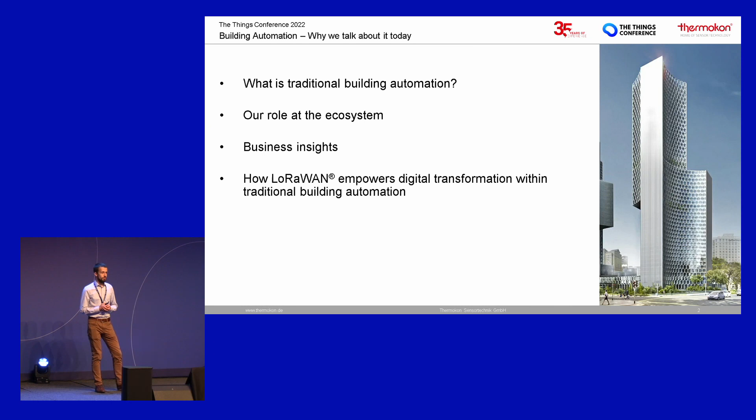Just so you get an idea what you can expect within the next 20 minutes. First of all, we want to show what traditional building automation mainly is about. Then show what Thermokon's role in this ecosystem is, so you get an impression why we are talking about building automation today, and give some business insights. And then come to the most important point and show how these traditional building automation systems can be empowered with LoRaWAN.

Okay. This year's Things Conference is under the topic of digital transformation. And we found a perfectly fitting statement that describes exactly the issue we are confronted with in traditional building automation. This statement says that digital transformation is about using structures of yesterday with methods of today to solve challenges of tomorrow. And now I want to show how this happens in building automation, and therefore I want to take you on a short trip through some basics of traditional building automation.

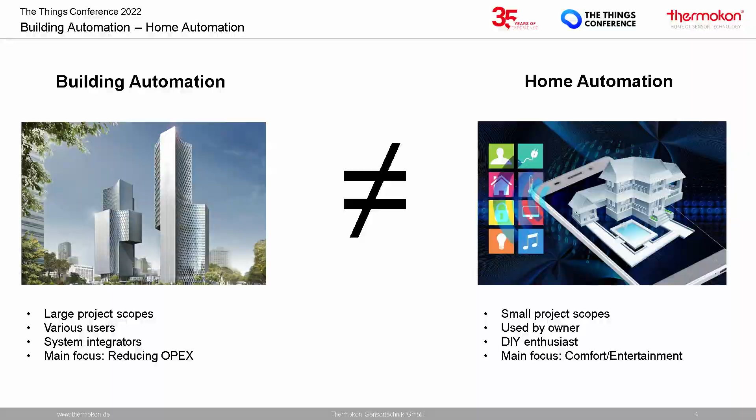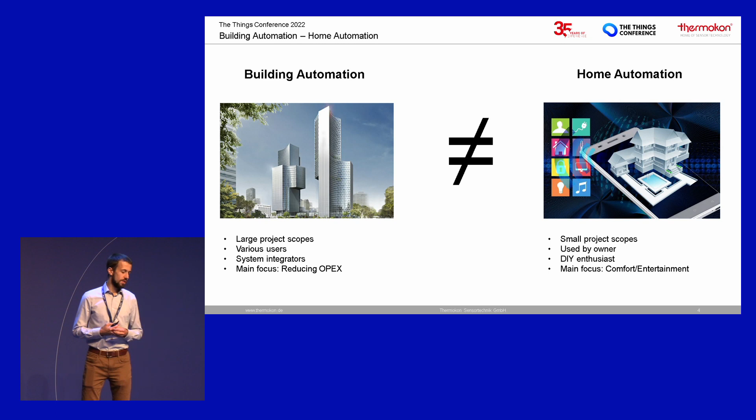First of all, a short definition so it's clear that we are talking about the same issues. There is a difference between building automation and home automation. The main difference is the project scope. That means if we are talking about buildings, the project scope is much bigger than in home automation. Also, the users are different, and building automation projects are often realized by system integrators, and the main focus there is to reduce the operational costs for the building owner. But the technology that is used in both parts could be the same.

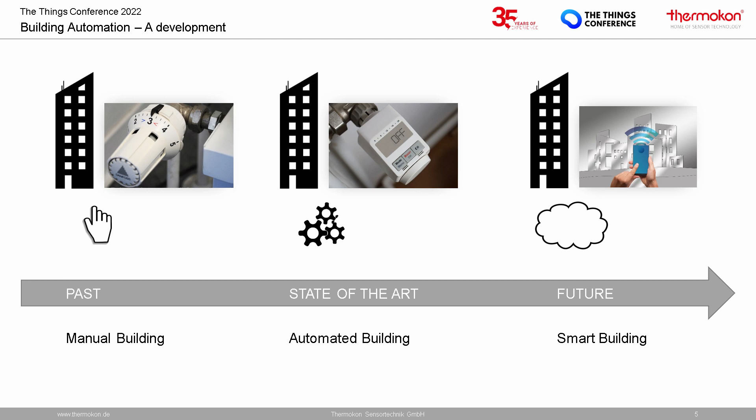During the last years, building automation has developed from a manually operated building to an automatically operating building, and then to a smart building, where this smart building also includes data and things around the building, for example outdoor weather conditions. Even if a really smart building that is connected to the internet and can be remotely controlled is technically possible, there are still many manually operated buildings in the field at the moment. And even if these buildings are automated, the automation is oftentimes not really smart, as we perhaps have a simple time-based shutdown command at the end of the day without taking into consideration the occupancy status of a building. This is an automated building, but it's not very smart.

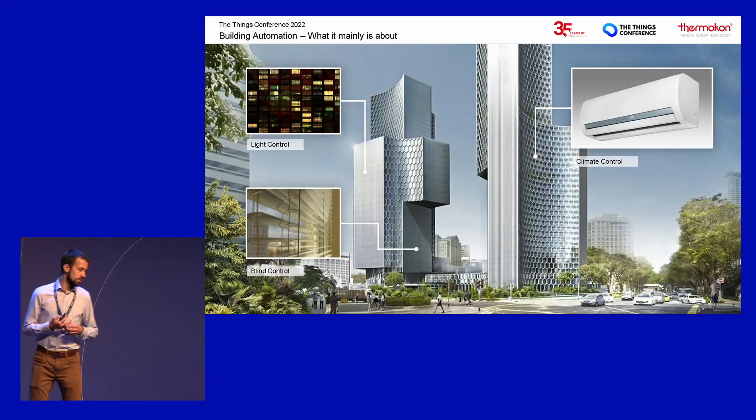When we are talking about building automation, we are mainly talking about these three different parts. The first part is climate control, everything that is related to heating, cooling, and ventilation. And the second and third parts are blind and light control. It's clear that there are also other topics related to building automation, like entrance control and fire protection, but we want to focus now on these three, as these three are mainly responsible for indoor air quality and for the emissions a building has. And that is the main goal of a smart building, that we could reduce the emissions the building causes, and also improve the indoor air quality.

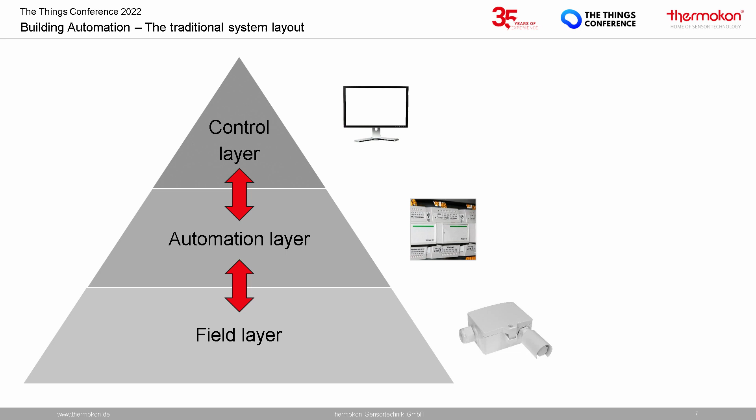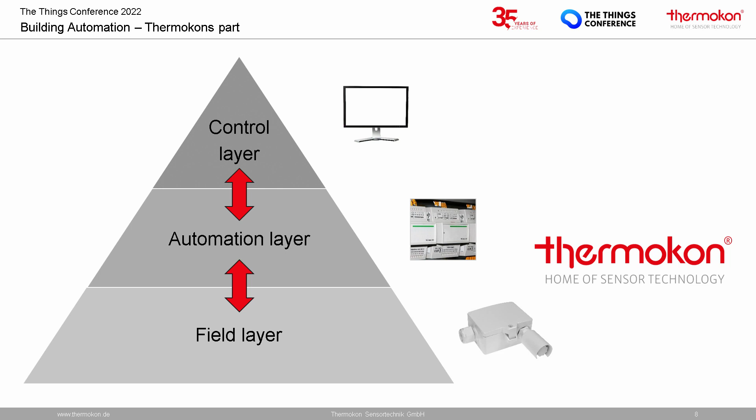As for Thermokon's role in this ecosystem, we have been providing solutions for building automation on the field layer for 35 years now. That means we build sensor solutions and also room operating unit solutions that take part in this ecosystem. If we are doing so, it's clear that our components have to have structured communication processes so that we can ensure that our devices can communicate within a standardized building automation system.

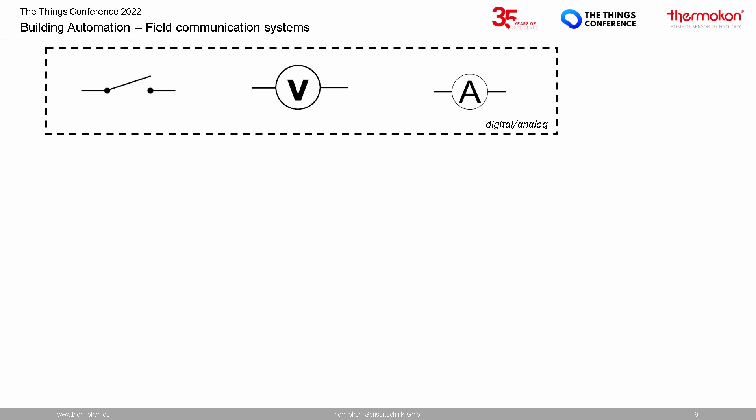So there are many different field communication systems existing in the field at the moment. The first, or let me say the oldest, are simple digital or analog outputs, just switching something on and off. And the simplicity of these systems is also the biggest advantage. That means you don't need experts to install them. And as they are so simple, they are also widely used in new projects today.

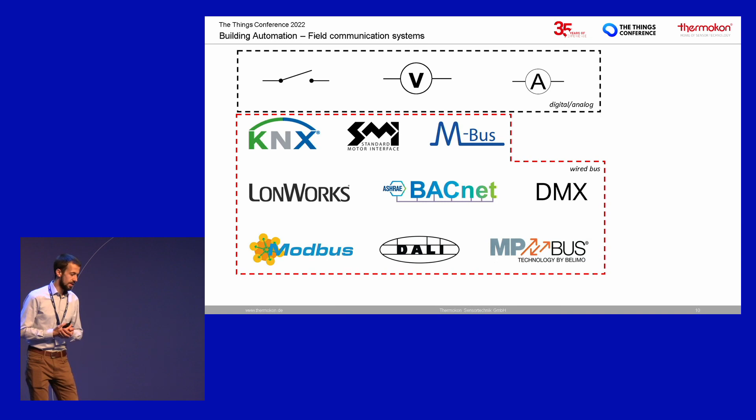The second type of field communication systems are traditional wired bus systems. These bus systems are used if you want to transmit more complex data. And each of these different bus systems has become a kind of standard in different building applications. Just to give an example, the DALI bus system is mainly used in high-quality lighting applications, and the BACnet wired system is mainly used in everything that is related to heating, ventilation, and air conditioning.

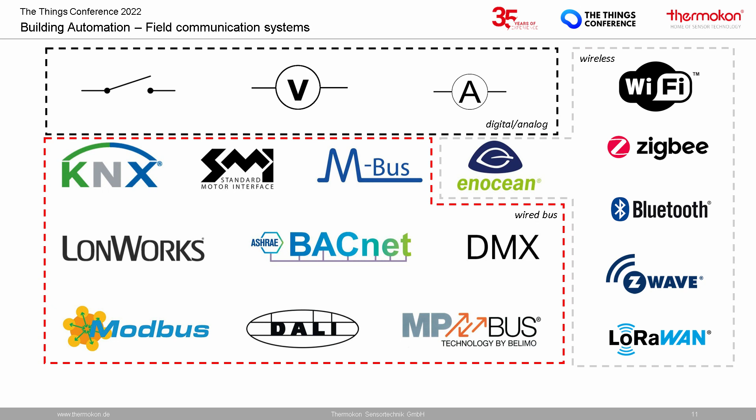That brings me to the third big group of communication systems in the building. These are the wireless systems. Each of these wireless systems also has its main application. If we are talking about EnOcean, then we're talking about energy self-sufficient devices. That means you don't have to care at these devices about battery lifetime or about a power supply, as these devices could operate energy self-sufficient.

If we need higher data rate, then Wi-Fi comes into the game. And if we want to cover long ranges, if we have, let me say, big buildings or need an IoT-ready protocol, then LoRaWAN is perfectly fitted.

Now, if you see all these different field communication systems, then it becomes clear that inside a building, everything is about interconnection. That means you need systems that can communicate with other systems, as it's hardly possible to find one communication system in a building that covers all requirements. These requirements in the building are sometimes very complex and very different. There are many questions that have to be answered before choosing the right communication system.

Just to give an example, is it a retrofit project, or are we talking about completely new construction? If we are talking about wireless systems, then oftentimes the question occurs, is a cloud application for the customer possible, or does he need an on-premise application? So also the application type is a very important reason.

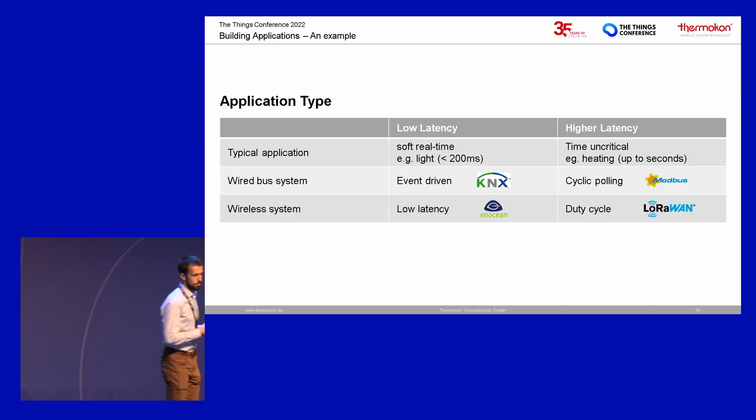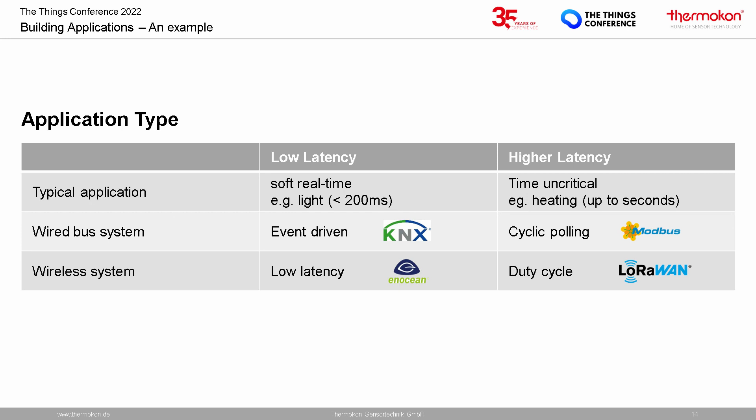If we are talking about soft real-time applications in building automation, we are talking mainly about blind and light control, where the user normally expects a direct response from the building. That means if I push the light button, I expect the light to be on within the next 200 milliseconds. So if we have this application, then we can choose an event-driven communication system like KNX, or a wireless system like EnOcean, which has very low latency times.

If we, on the other hand, are talking about applications where a higher latency time is no problem, for example, a heating system, where it doesn't matter if the heating turns on 5 seconds later or earlier or a minute later, then also, let me say, a slower bus protocol like Modbus is no problem, or the duty cycle restrictions of LoRaWAN also are no problem. So this was just to make clear that there are many questions to answer before choosing the communication protocol for a real smart building.

Besides the control system in the building, there are also other systems existing. Nearly every commercial building has its own IT system. And the issue we are faced with in the field is oftentimes that these systems are independent from each other. That means there are different responsibilities for these systems. They are locked to each other, and it's very hard to get access to such a system if you need their infrastructure. Sometimes this leads to some curiosities.

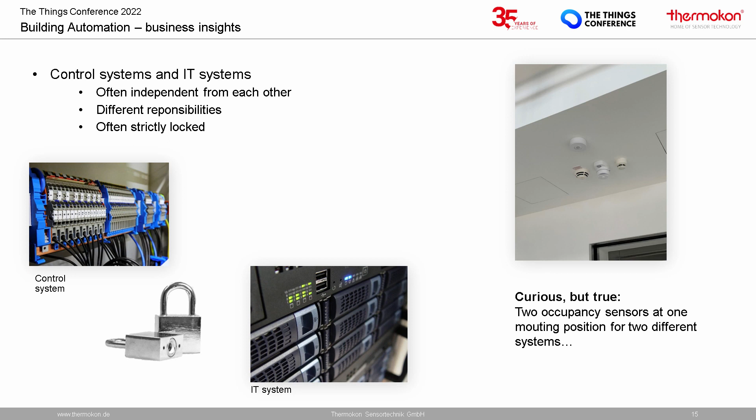As you've seen on the right-hand side, it was from a real project we were faced with. There you see 2 occupancy sensors mounted on the same position, but they belong to different systems. So if you're talking about green buildings or smart buildings, it is not very smart to put 2 times the same sensor to get 1 signal out of the room. But there are different responsibilities. The systems are not able to communicate with each other, so there was no other possibility.

There are also some other points very important in building automation. At the moment, in building automation, there are very systematic and long tender procedures. That means there are many participants along the chain that you have to convince if you want to introduce a new technology, and that sometimes makes smart building applications a little bit slow. Also, if we are talking about on-site construction, we have divided ecosystems. That means if you want to install a technology that belongs to different ecosystems, it can cause some struggles on-site later.

Many buildings are also, at the moment, operated by data point-driven business models. That means the owner has to pay for every data point he needs in his building automation system. And so the system integrator is asked to build up the building solution just for the minimum needs for a sensible automation. But these buildings cannot offer their whole potential. Perhaps sometimes there's just 1 data point missing to make a regulation really smart, and it's oftentimes not possible to get these data points, as in the earlier stage they were not agreed in the business model.

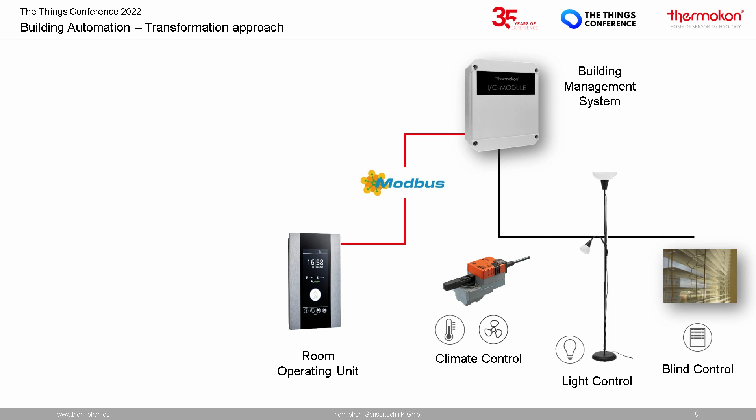Here we see just an exemplary example of a traditional building management system. You have in the upper part a building management controller where a room operating unit is connected directly via a wired Modbus communication interface. Then you give the inputs from the room operating unit to the controller, and this controller then controls the climate control, the ventilation, the light, and the blinds. That means we have very low latency times in the room, we have a familiar user interface, and this is, let me say, the single room automation solution.

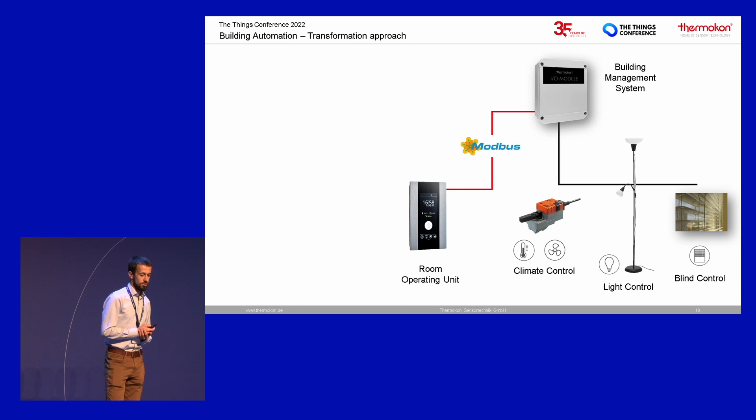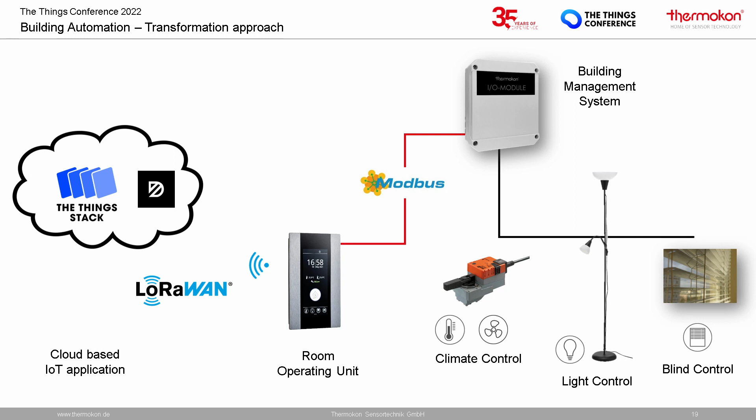If you now add LoRaWAN connectivity at the point of the room operating unit, you have the possibility to get all the data out of a room directly into a LoRaWAN-based IoT application. That means you can fetch all the sensor values the room gives you. You also can fetch the actual state of the lights, the blinds, and the ventilation system. And the other way, you can also put some override commands. That means you can put really smart control commands back to the system using the LoRaWAN ecosystem.

I hope it now becomes clear how both systems, the IT system and the control system, could come together in, let me say, one device. And the main advantage here is that the existing building management system could stay as it is. That means you don't need physical access directly to the building management system. You don't have to change any components. You don't have to replace everything, and you are relatively fast with deploying this solution.

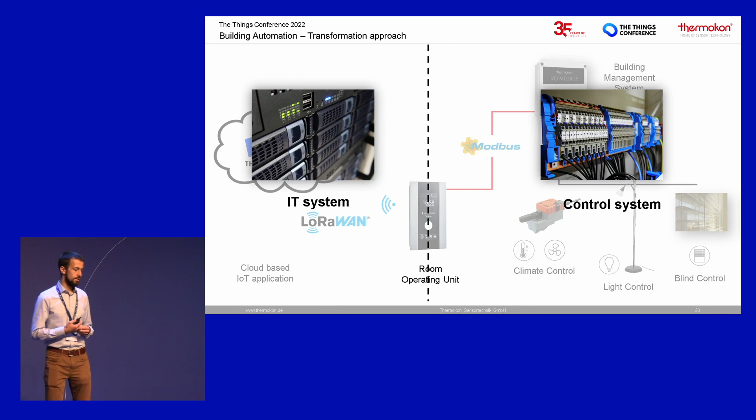Why have we chosen to implement this into the room operating unit? The room operating unit is one of the central points in building automation, as this is the point where the user directly gives the input and gets the feedback from the system. The user is very familiar with this user interface. And so if we don't have to change anything and this user interface could stay as it is, that is very nice for the user.

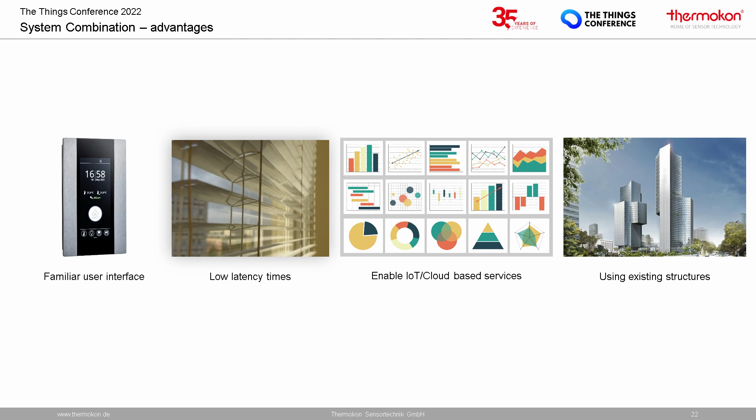Also, you have a very low latency time for the room control solution on-site. That means if you go to the room operating unit and switch the light on, there is no latency time in between, as the on-site control stays as it is. And if we're fetching all this data from the room operating unit, the enablement of IoT-based services like dashboards, AI optimization, whatever, is very easily possible. And also you can use the existing structures that we have today out in the field, and you don't have to change all these components.

Yeah, we have now seen an example on the right part, where we have shown this approach for a wired traditional building automation system. This is also possible for wireless systems. EnOcean is oftentimes used for single-room automation systems, especially for retrofit projects where it is not possible to install a big building management system afterwards.

So now we are adding an interface to LoRaWAN and just fetching the data that are necessary for monitoring or for override functionalities. That means the on-site traffic for the regulation is done on-site via EnOcean, with low latency times, and you can use the whole EnOcean portfolio that exists in a building, and you just use the power of LoRaWAN for the remote monitoring and, let me say, for the remote control.

So referring back to the slogan we had at the beginning, I hope it now becomes clear how LoRaWAN could use the structures of yesterday, that means the existing buildings, and put the power that this ecosystem has nowadays to solve the challenges of tomorrow, and I guess these challenges are quite obvious for every one of us.